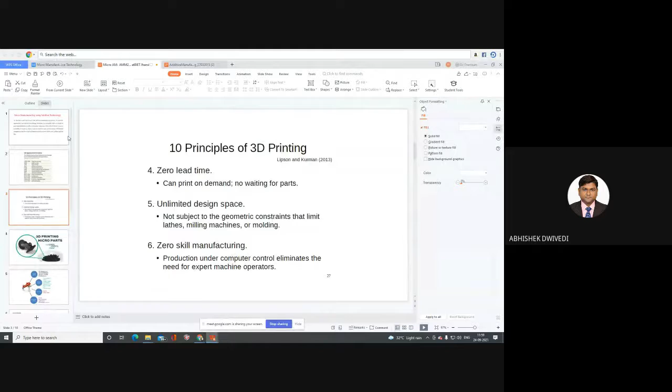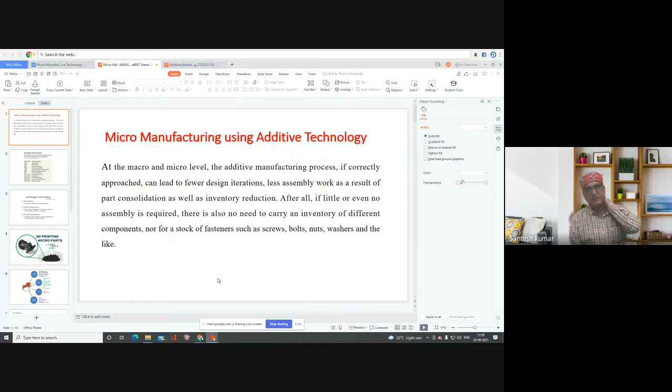So that is a very common type of manufacturing process we are using right now as a layer process, or we are using 3D printers for the manufacturing of some components. So you know additive manufacturing; earlier it was named rapid prototyping, and today it is known as additive manufacturing in academia, and in industry it is known as 3D printing. It is also known by other names. It is very popular, and it has become so important because it's manufacturing in a natural way.

So see, additive manufacturing is a different technology that has developed after around the 1980s. It is now called a disruptive technology, because it's a natural way of developing products, a natural way of shaping. Bigger objects have been done, but this talk is concerned with the micro level. At the micro level, the additive manufacturing process, if correctly approached, can lead to fewer design iterations, less assembly work as a result of part consolidation, as well as inventory reduction.

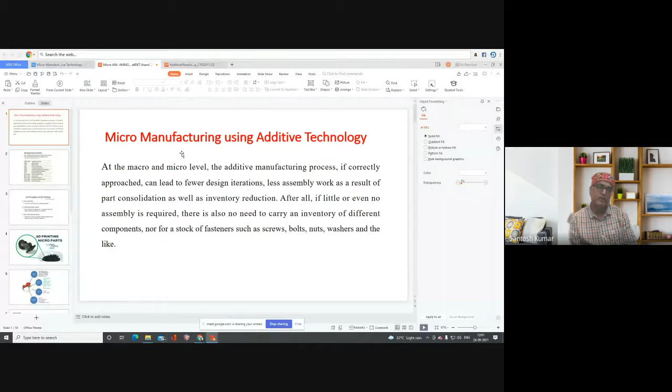And after all, if little or even no assembly is required, there is also no need to carry an inventory of different components, nor a stock of fasteners such as screws, bolts, etc. So that is what I'm trying to start with. But before going into the deeper part of micro manufacturing, let us understand the history of it.

Additive manufacturing, if you look at the timeline here, started, named as rapid prototyping, in 1988-94. Then there has been the addition of different processes using additive or rapid prototyping, like rapid casting, rapid tooling, and additive manufacturing for automotive in 2001. Then in 2004, you can see it expanded into other areas, like medical applications and aerospace applications. And you will see by 2013 to 16, nano manufacturing. Nano manufacturing is much smaller than the micro level we are going to talk about.

Then there is the bio implants, in situ manufacturing, full body organ. So all these things are ahead, but we will limit ourselves to.

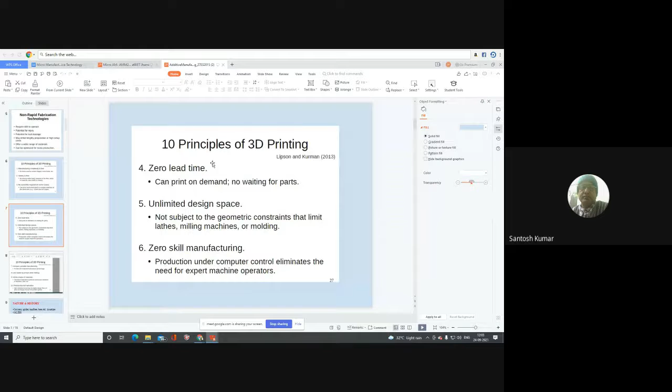So now this screen you are able to see. Huh? Hello? You are able to see this screen, please?

Yes, sir. So let us see quickly these items, that is the history, technology, because otherwise you will not get connected. So as I said, rapid prototyping or additive manufacturing or 3D printing is a digital manufacturing. It is called digital manufacturing because it uses CAD tools to create it, and then transfers it to the CNC machine, which is called the additive manufacturing machine, and then it will print.

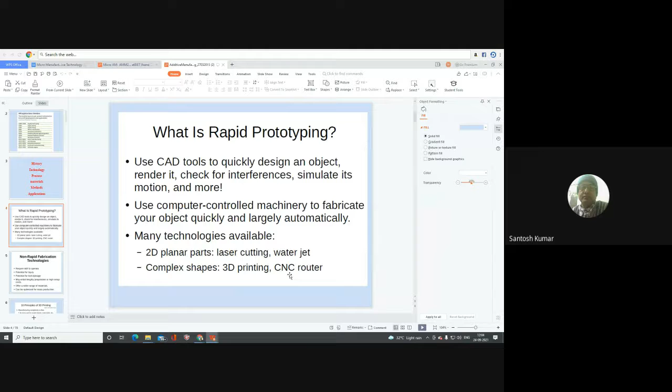You know the 2D planar part printing, you are all aware of. Your 2D paper printer, color 2D printer, laser color 2D printer. And you will also come to know other technologies like 2D planar parts, laser cutting, water jet, complex shapes, 3D printing, like that. So these are your non-rapid technologies.

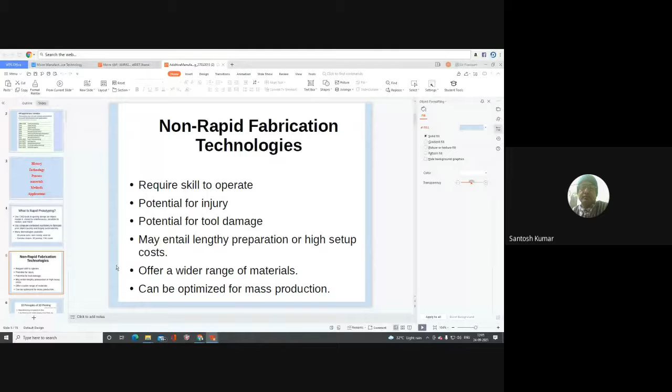So what happens in non-rapid technologies? It requires skill. There is potential for injury. That is the conventional. Potential for tool damage, and may entail lengthy preparation and high setup costs, offer a wide range of materials, and it can be optimized for mass production also. That is what is non-rapid or conventional way of manufacturing, right?

So let us see what are the 10 principles of 3D printing or additive manufacturing. This is very important. These principles are valid for bigger 3D printing as well as miniature or micro level 3D printing or nano level 3D printing. Okay, so these 10 principles do not change. Let us see. They were first proposed by Lipson and Kurman in 2013. That's how it is written here.

So number one is that manufacturing complexity is free. As compared to the conventional, here you do not require any extra cost for a complex shape. Suppose there are some extra holes, extra features, then you do not require any extra cost. Whereas in the conventional way, you require extra cost. Variety is free, so no cost to make many versions of the item.

Excuse me, sir. Sorry to interrupt. Sir, can we have the full screen of the presentation if you don't mind? Full screen. Yeah, sir, I think slideshow. Now it is. Yes, sir. Thank you, sir. Now it is okay.

So variety is free, and then no assembly is required here. That means the whole assembly you can print in one go. There is nothing like print and assemble. You can print interlocking parts or multiple materials at the same time. Like you have a door plus its hinge, you can print simultaneously.

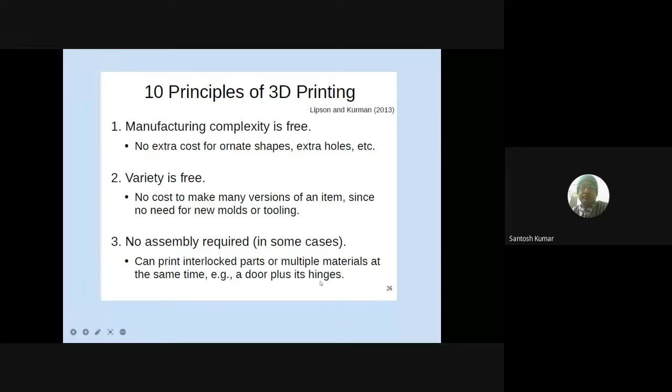The fourth principle is zero lead time. That means you can print on demand, no waiting for the parts. You get the CAD model and immediately print. Fifth is unlimited design space. It is not subject to the geometric constraints that exist on conventional machines like lathe, milling, molding and all that. Here there is no geometric constraint.

You can print the object as per the table size of the printer, and even if it is bigger, you can cut it in pieces and then print on the same table, and then later you can assemble or join.

Then six is zero skill, because it's CNC machine based printing. And the programming is also automatic here, because the printer software is such that you have to just put the CAD model or the STL file of it, and then automatically it will do everything, slice generation and all that, and it will print. So nothing you have to add from your side. Therefore you do not require any skill.

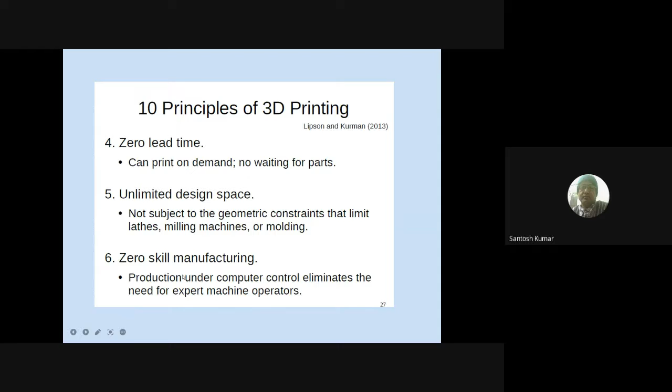Seventh principle is that it is compact, portable manufacturing. The printers are very small, and it requires very small build space to print a large component also. Eight is less waste by-product, because there is no chip formation like in milling and machining operations. So you have almost negligible waste material here because it works on the layer-wise deposition method.

Ninth is infinite shades of the material. So you can blend material to produce continuous variations in hardness, color, etc. That is possible here. And the last principle is precise physical replication.

So very high resolution scanning and the digital design files can allow exchange of the 3D objects in the 3D data, and you can then make the CAD model from the cloud data, and then you can print exactly the same. So these are the very, very fundamental principles of 3D printing.

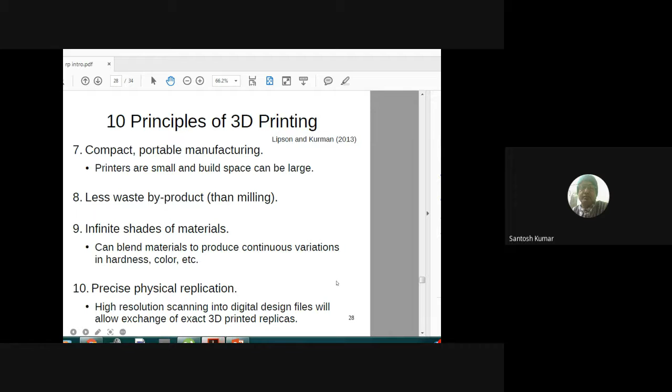So why I am saying it is a natural process, because if you look at the cocoons, spider, mud bees, etc. in nature, and also the making of jalebi as a sweet. So based on this inspiration from nature, in 84, people thought to make a machine. And because there was a lot of development of CNC machines, it was easy to conceive this idea.

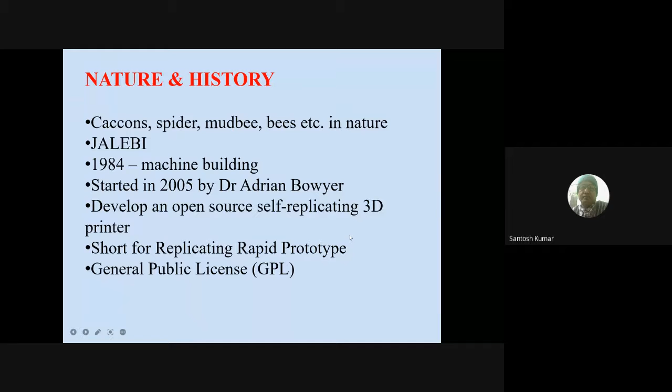And in 2005, Dr. Adrian Bowyer developed such a self-replicating 3D printer, and later it got a public license. And nowadays you will see a lot of printers are available. So now you see, this is the inspiration from nature.

So can you notice what it is? Anybody? Can anybody answer what it is? Hello? Hello? It's a cocoon, sir. What it is? It's a cocoon. Exactly, cocoon worm.

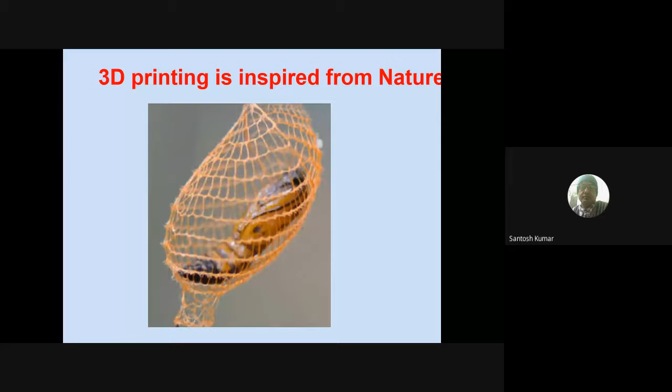So this cocoon worm eats a leaf, a very popular leaf, and through its saliva it makes a thread-like structure. That is what you call resham, na? It makes its shelter, because the worm lives inside, and later humans learned to use this for their business, because they learned how to kill this worm and take out this deposited thread-like structure, right? So this is what is in nature already.

You can also see these things on most rainy days. You can see these structures. Hello, you might have seen these structures. Am I right? Yes, sir. Generally this is mud and a mixture of small tiny dried grass, which these insects create for their shelter. Again, for shelter, laying their eggs inside for safe conversion from the pupa to the grown one. These also you can see.

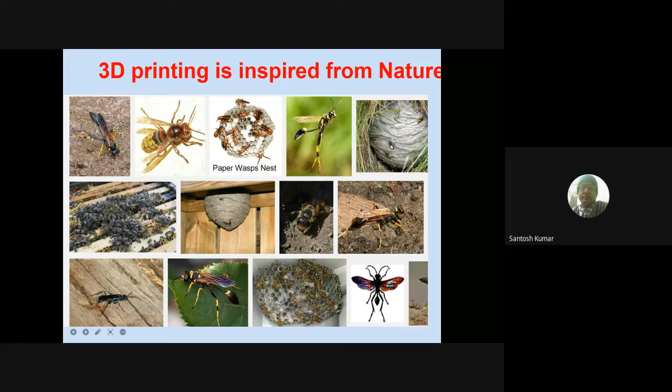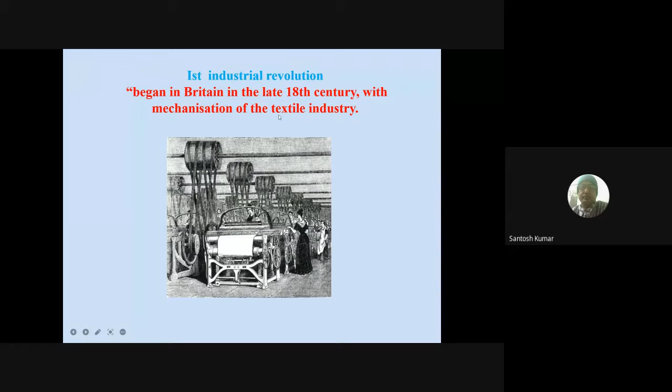The honeybee also, there are a lot of things. So they are the carriers of 3D printers, you know? Now you see this one is very natural. You can see it even today. And then, in the 18th century mechanization started, then computers developed, and 20th century mass production, so you can understand additive manufacturing is the next industrial revolution, which talks about the additive way of making, while the earlier conventional method has been subtractive.

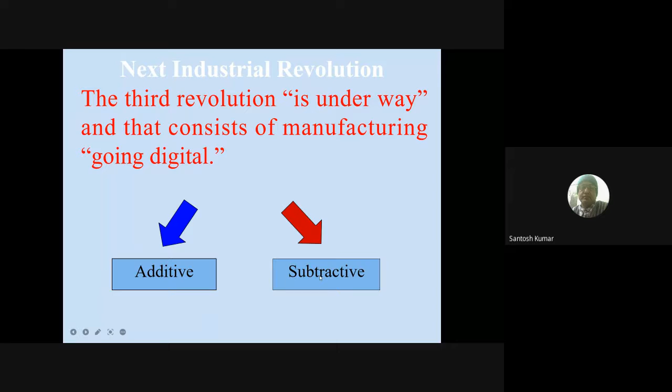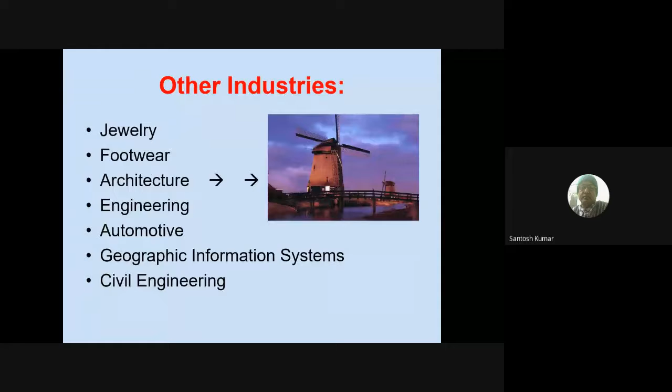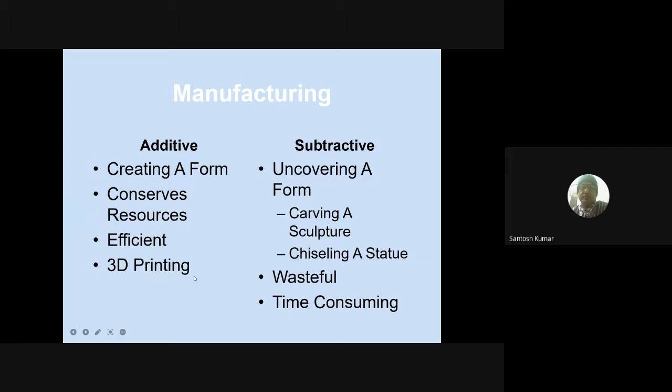So it has a lot of applications, many applications. So this is the subtractive way, right? So this is the difference between additive and subtractive. In additive, you create a form. In subtractive, you uncover a form. In additive, there is conservation of resources. Here you have carving, sculpture, like that. Additive is efficient, but subtractive is wasteful, time consuming, like that.

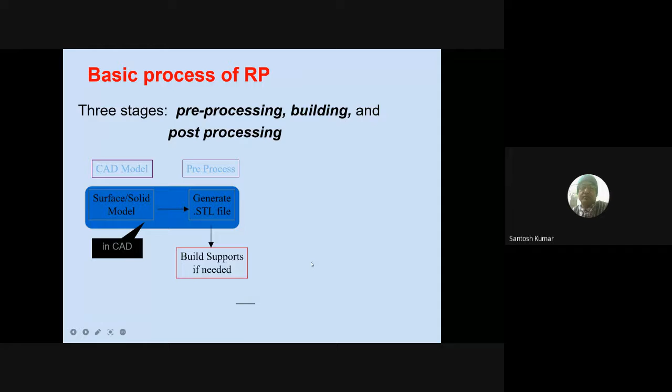So these are the basic steps in additive manufacturing or rapid prototyping. I said it is also called digital manufacturing. So you start with a CAD model. You can choose any software to create the CAD model, using surface modeling techniques or like that. And then that CAD model is converted into stereolithography format, .stl. So the .stl becomes the input for the pre-processing.

From the .stl file, the required support is generated, and then slicing is done, and this sliced data is sent to the 3D printer or additive manufacturing printer, and it will print layer-wise. Once it is printed, you have to remove it from the platform. You remove the supports if they are there, then you clean the surface, a little bit of post curing is required, and then you get the part.

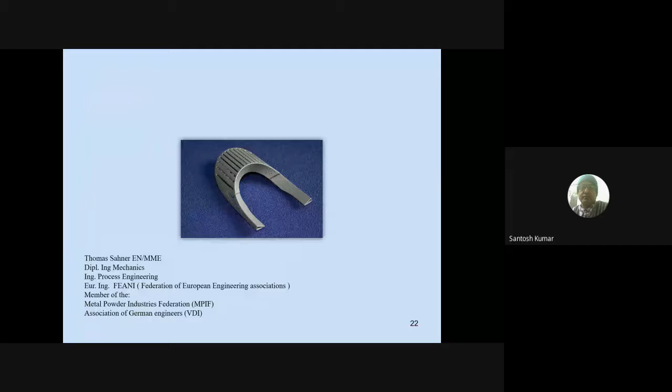So this is the fundamental process of any additive manufacturing process, whether it is metal printing, plastic printing, any material printing, or composite printing, either in color or black and white. So that's the very fundamental you might be knowing. So this is one of the metal printed parts.

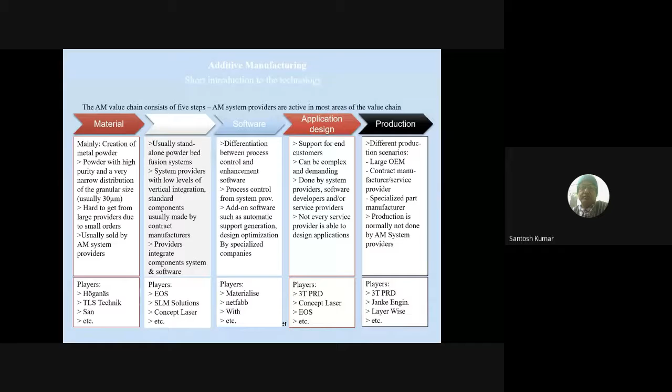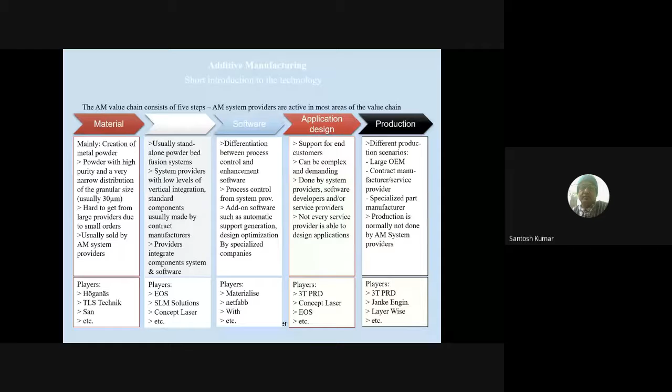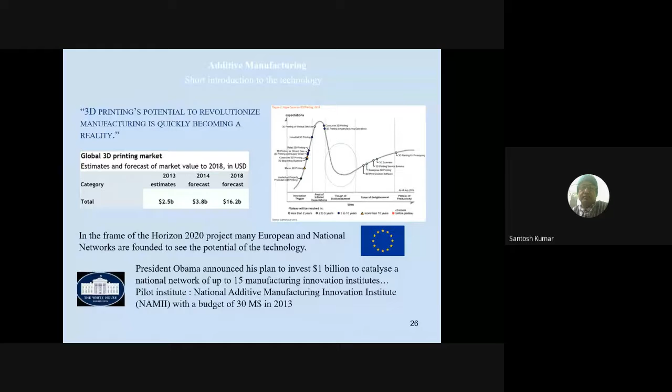So you see that additive manufacturing has a great development at the level of material development, process development, software development, design, and even today production. So mass manufacturing is also going to become possible very soon with additive manufacturing. It has a great advantage. All over the world, it is becoming very popular, and you can understand that

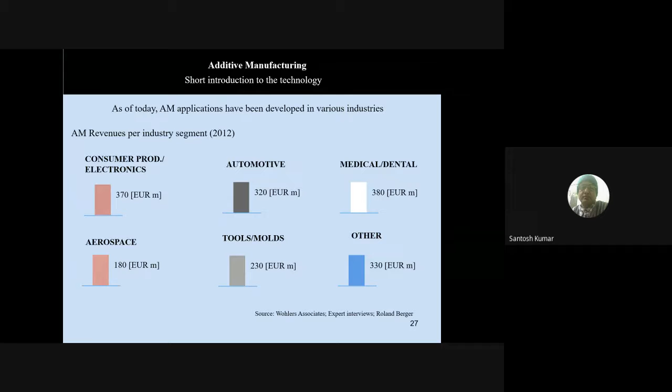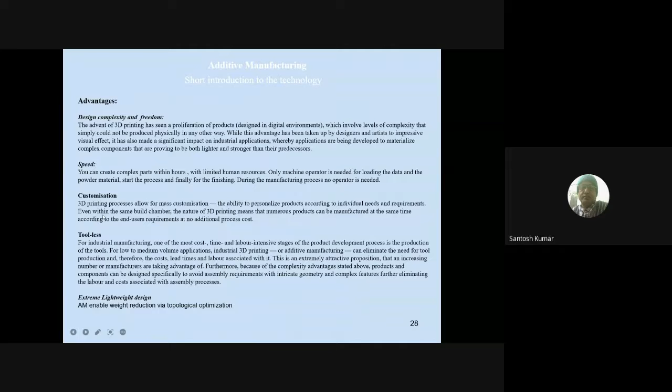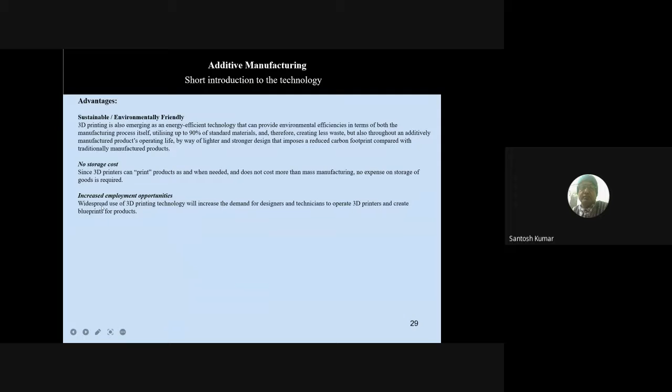it is becoming a very huge business in the coming period because of its advantages like design complexity, speed of printing, customization, toolless printing, and all that, and it is sustainable to the environment. There is no storage cost, and also it leads to increased employment opportunities.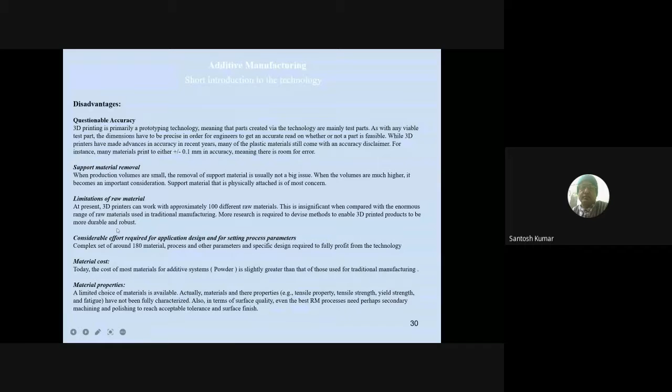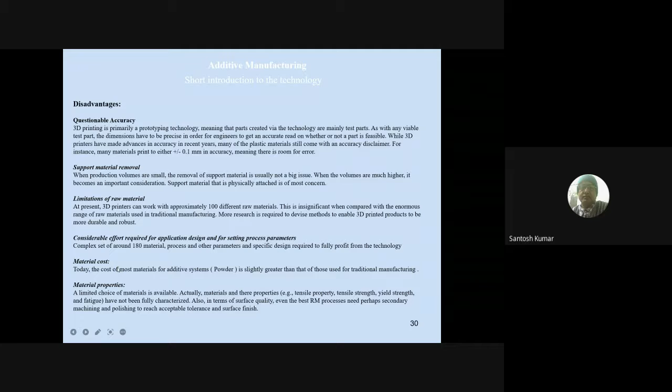The disadvantage is that the accuracy is not as good as compared to the conventional way, and support material removal is one problem here. Limitation of the raw material is there, and it requires considerable effort for the application design and for setting up process parameters. Material cost, for metal, is costlier, and not many material properties are available. So these are some of the disadvantages, but in time to come all these things will get over.

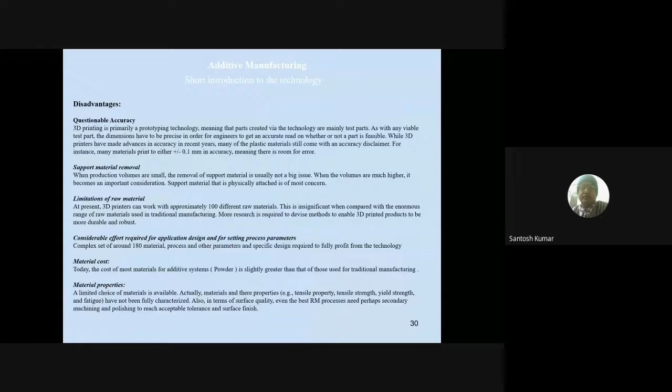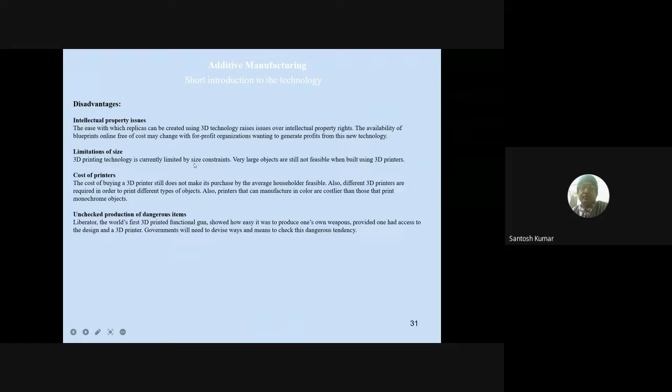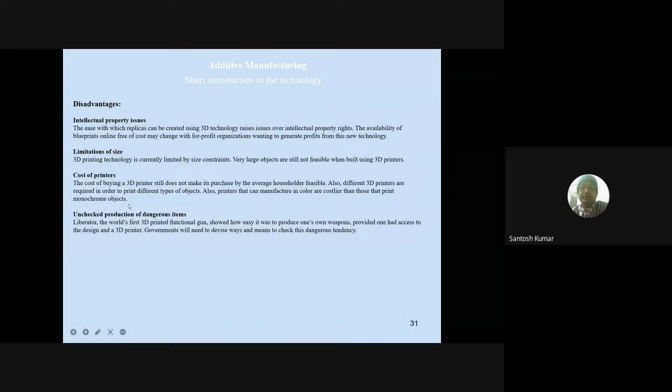Another thing is that intellectual property issues are there, and limitation of size is there, but size is no more a limitation now. You can print very big. Now whole 3D printed houses are also printed. So that has already spread. In 24 hours, you can print, say, a 4-story building, a total flat system. So that is now coming up one by one. It requires planning, design, like that. So these are other applications.

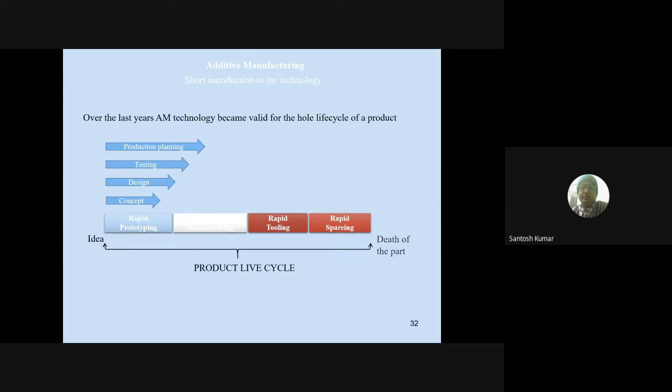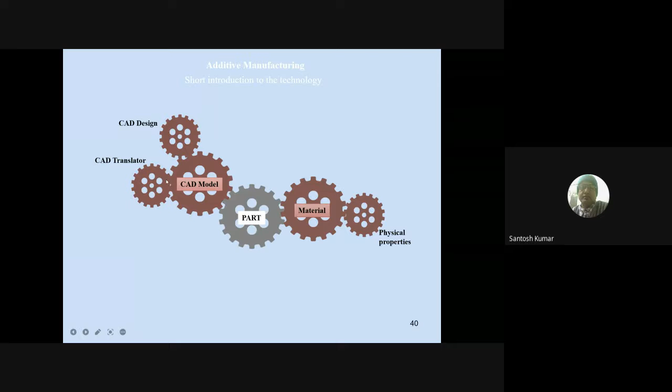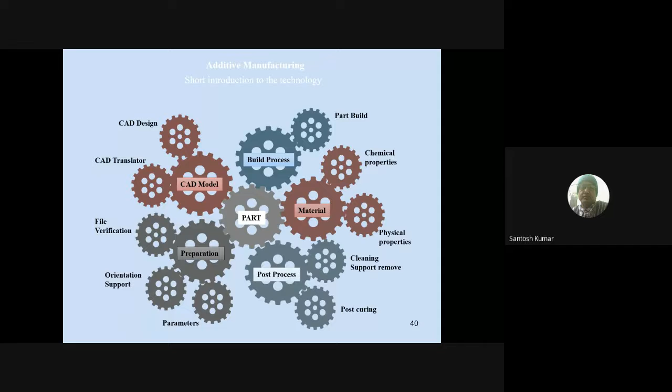What I was talking about. So you have this way of, as I told, these are the different... While printing, you have different processes and issues related with additive manufacturing. This is what I'm putting again in a different way. So these are some conventional.

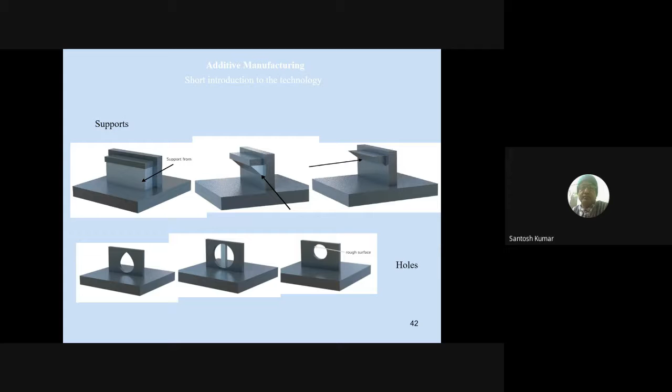So see, this is a support material. Here it is a support material. This is also a support material, which is required for printing. Otherwise, it will not get printed. Like here, these are the holes. So here, see, this is the support material. This is support material, and these are also support material.

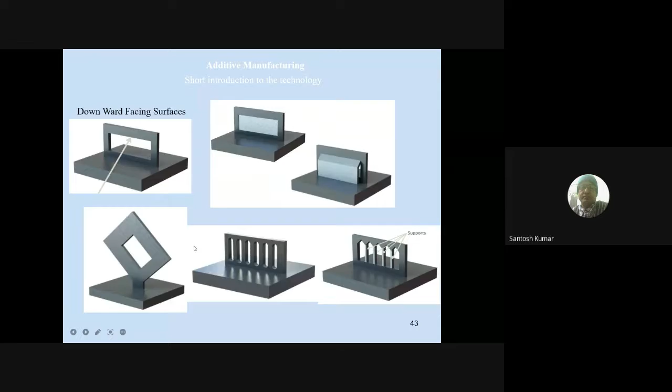So the process has different types. Additive manufacturing is liquid base, powder base, and solid base. In liquid base, you have stereolithography, jetting systems, and direct light processing systems, that is DLP. In powder base, you have a lot, like SLS, three-dimensional printing, fused metal deposition systems,

electron beam melting systems, selective laser melting systems, selective masking sintering systems, selective inhibition sintering, electrophotographic layered manufacturing, high-speed sintering systems, and solid base printing has fused deposition modeling and sheet stacking, that is called the LOM system. So these are some of the technologies.

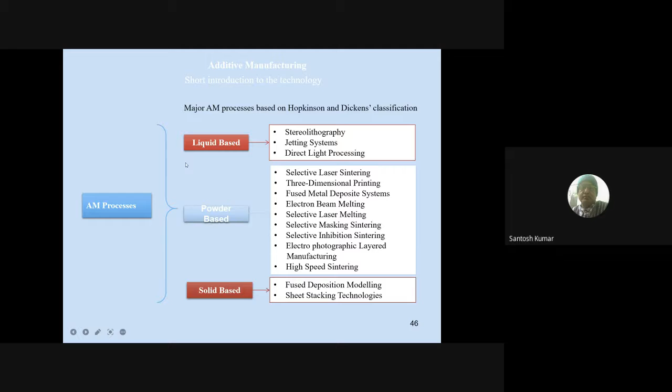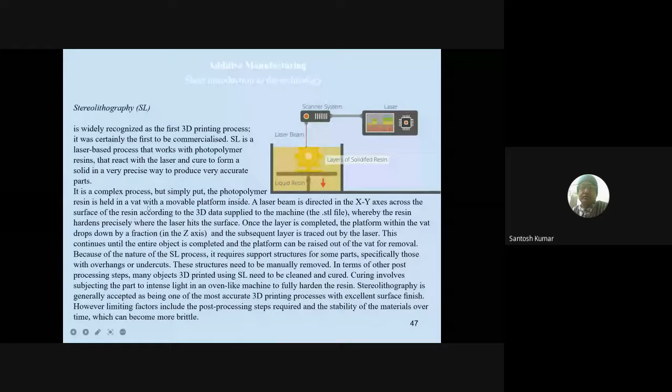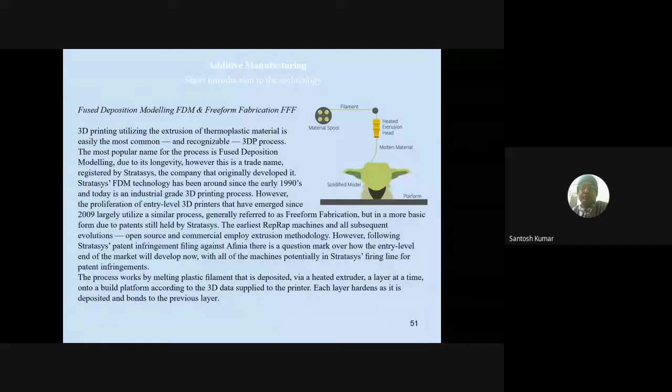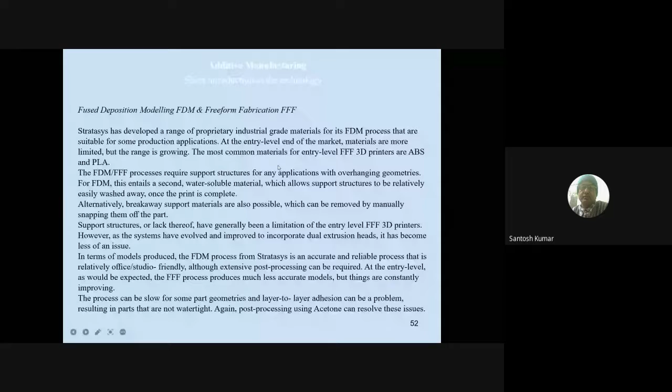Stereolithography is liquid based, where photo resins are used, and with the application of a laser they get cured, layer wise, one above the other, and printed. There is DLP, which is similar to that. This is the laser melting process, where you use powder. Then there is fused deposition modeling, where you have a heated nozzle and the filament melts there, and then it gets deposited layer wise. Fused deposition is a very cheap way of printing.

And this is the LOM I mentioned. Here a sheet is laser cut and deposited one above the other. So every layer is laser cut from the sheet and deposited one by one. And the cut reel is wound on the other side. So this is a laser. It cuts the layer.

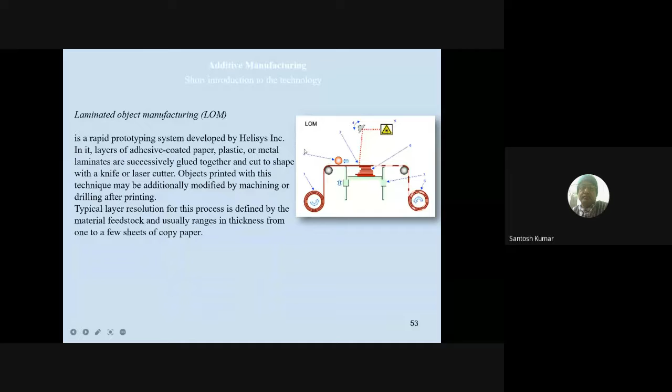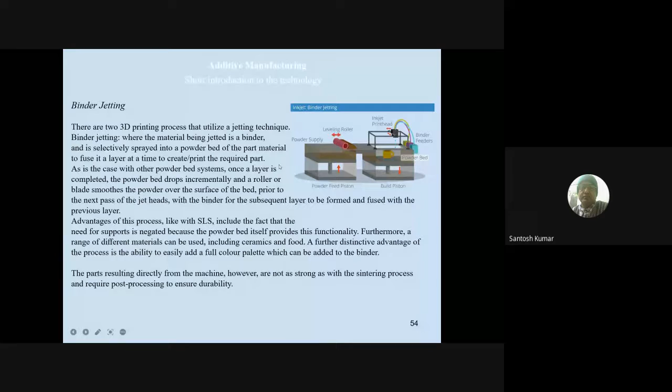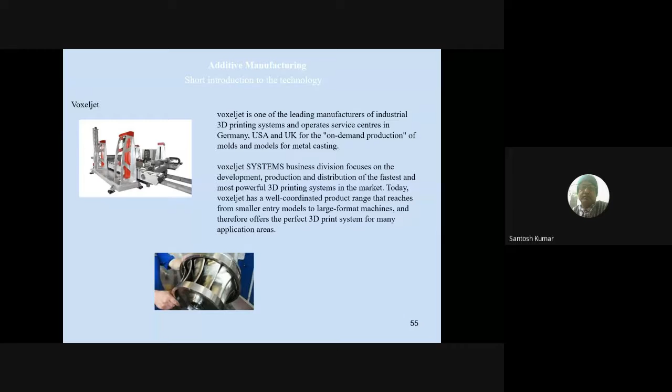Binder jetting is another technology, which is like inkjet printing. So binder jetting is just like 3D color printing. So here you can print. This is a voxeljet. Voxeljet is direct 3D printing. It prints in 3 dimensions, whereas conventional additive is layer wise 2-dimensional printing one above the other. But here, voxel is 3D area printing.

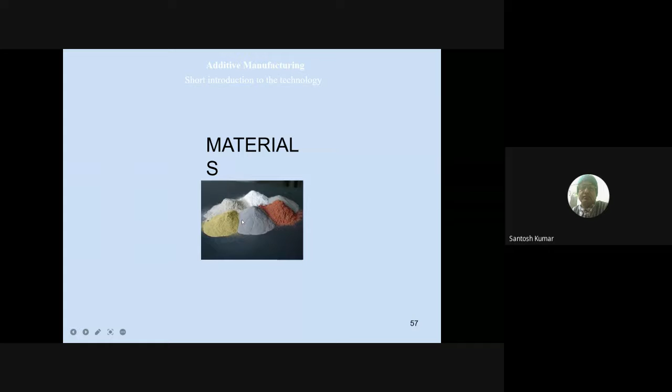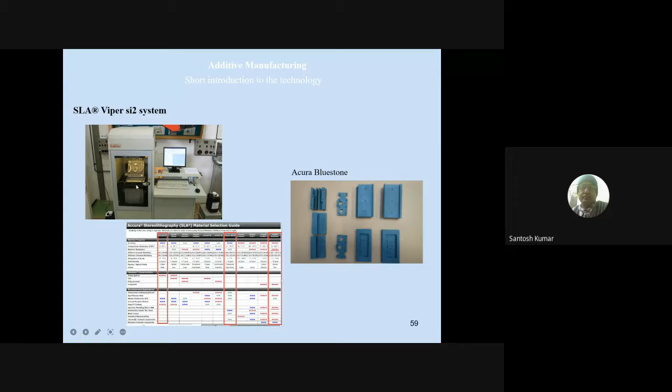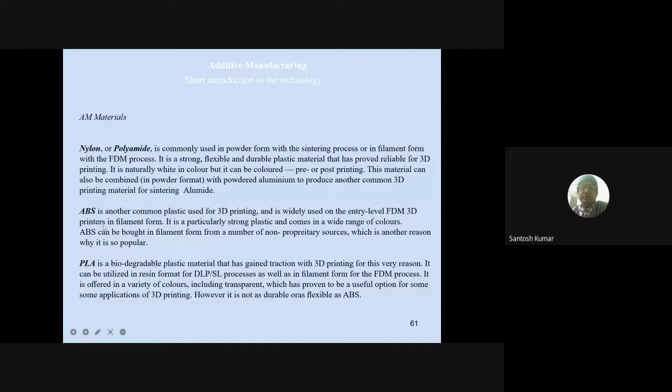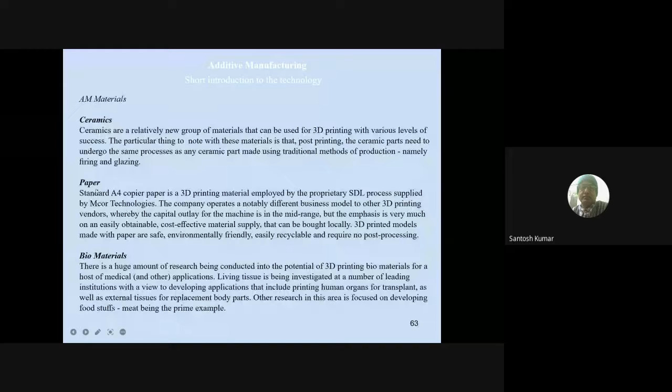You can print nylon, ABS, PLA as plastic materials. Wood material, wood plastic, and also stainless steel metal printing, titanium printing, ceramic printing, paper, biomaterial printing. Skin can be printed, food items can be printed.

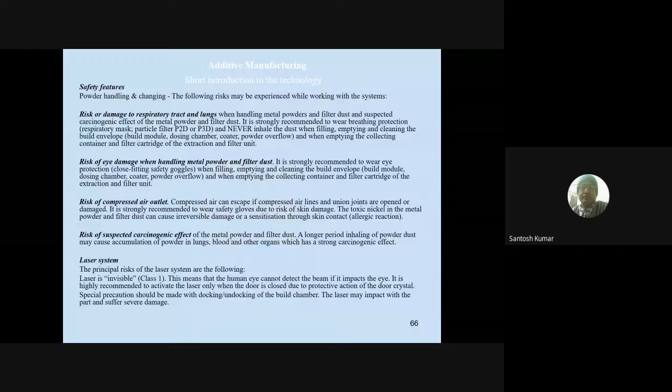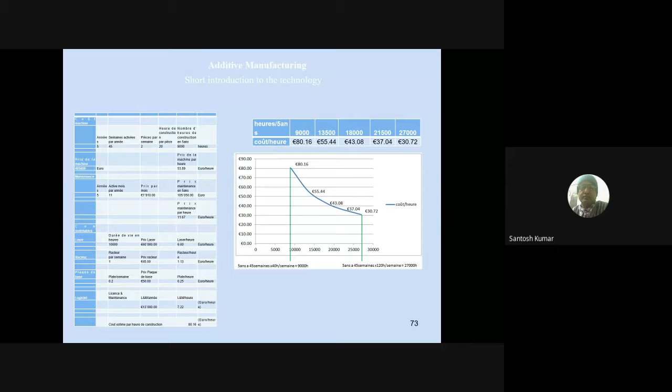So there are a lot of things you can print. Now let me come to the important part.

The miniature part, the micro. Generally for micro level printing you can use FDM, SLA, or electron beam printing. Most of the low cost printers available in the market today can print with about 100 micron accuracy. Any feature of 100 micron is already a micro level, so you can print at least 100 micron. That's very good.

The SLA printer, most SLA printers go up to 50 micron, sometimes 20 micron. The 20 micron printers, like Formlabs Form 3 and Form 2 that we have in the lab, Form 3 can print up to 20 micron. So very small miniature features you can print.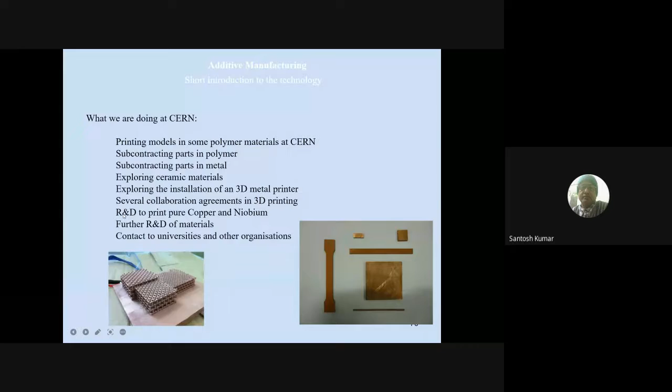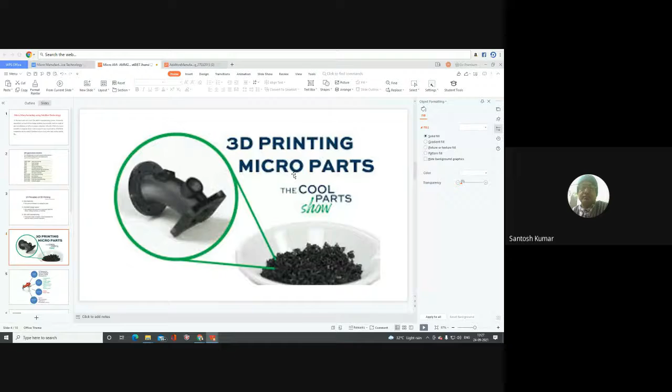So the question is how do you use this technology for printing. The 3D printing technology is now already established. Now your job is how do you exploit this technology, how do you exploit it for micro parts.

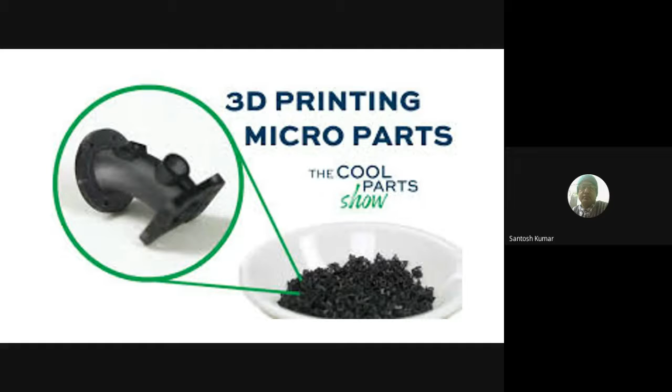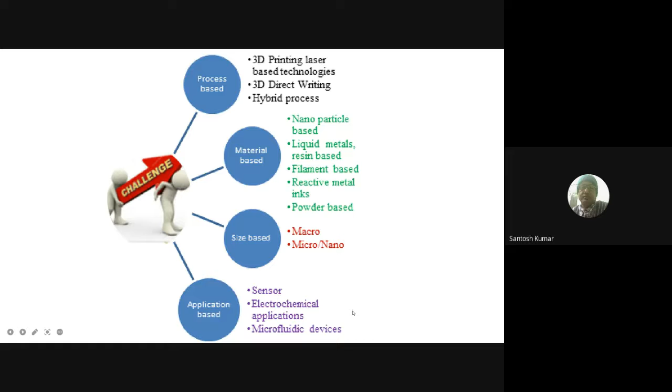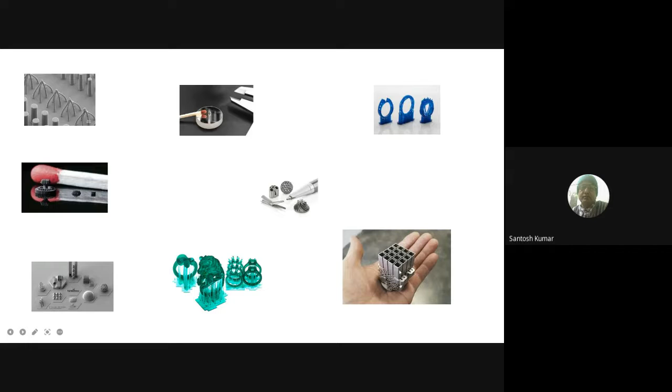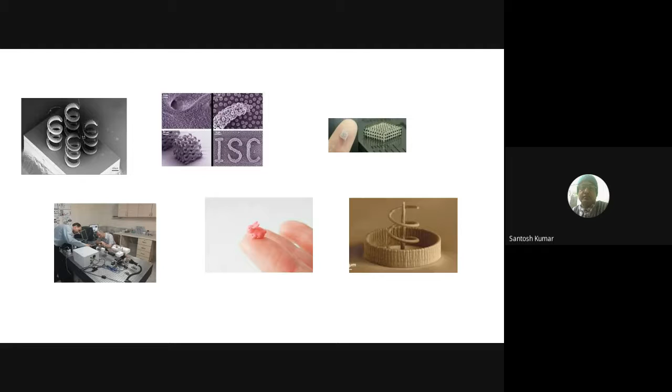This is one of the laboratories for micro and nano printing. This is one of the printed parts, plastic, that is an SLA printed component.

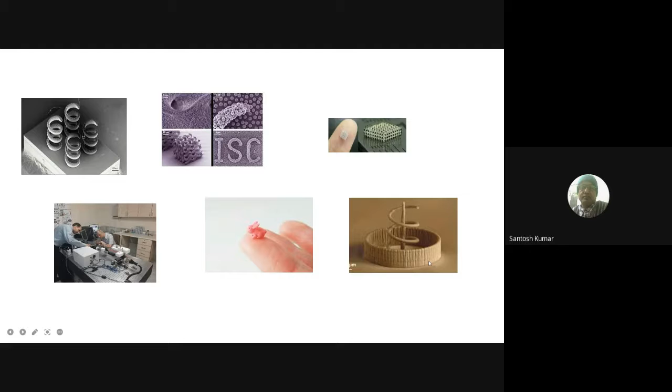And this is another one - this is microfluidics. It is a very nano size thin channel you can print, where...

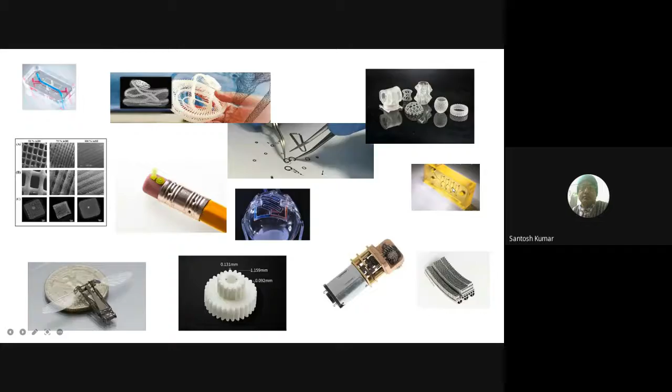This is another whole motor, miniaturized. This is a micro extrusion printing, generally used in biomaterials - you can print skin, bones, body organs later. So that is what the applications are at all micro levels.